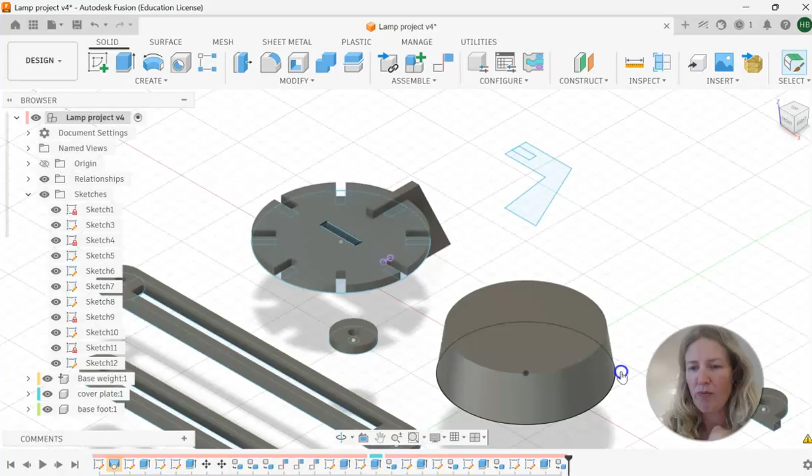So here we go. Let's go to new, and a new part design. We're going to start a new sketch on this plane here, and we're going to start with a circle. There we go.

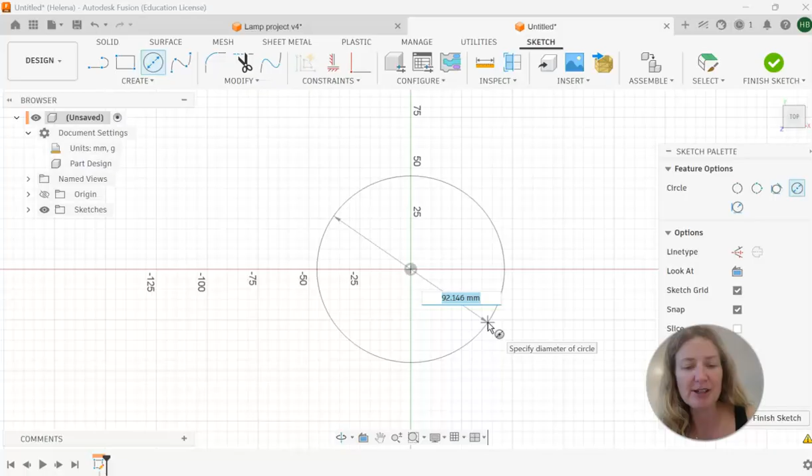So I'm going to give a 10 mil allowance on either side of our circle, which is already 110. So I'm going to make this 130. I type 130 and then I press enter.

All right, so next up we're going to create our notches. Now I'm going to intentionally draw this not centered, because sometimes it can lock to center and then be a little bit difficult to position. So I'm just going to draw it somewhere up here, but not in the perfect place.

Now this is our notch out, which you're going to make a choice on: is it going to be 3 millimeters, or is it going to be 6 millimeters with double layered plywood? So I'm going to keep things simple and go with 3.

Firstly, the depth of my notch out needs to be a reasonable depth so that it's strong. I'm going to choose 7 millimeters. So I type 7, then I press tab, and then I type 3 for the width of the plywood, and enter.

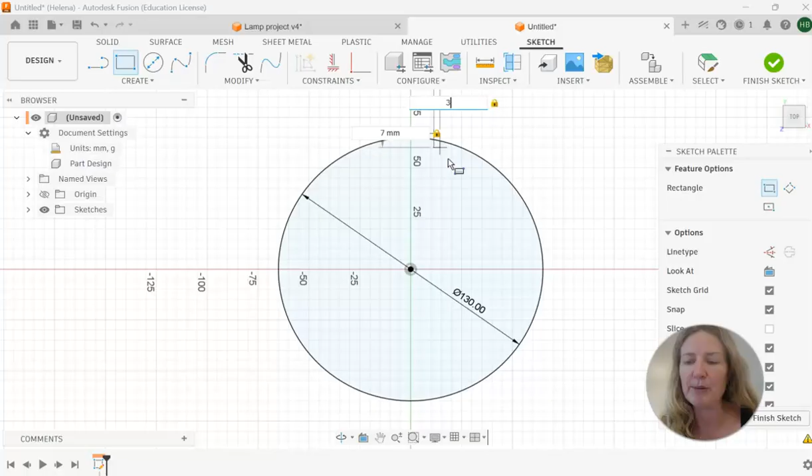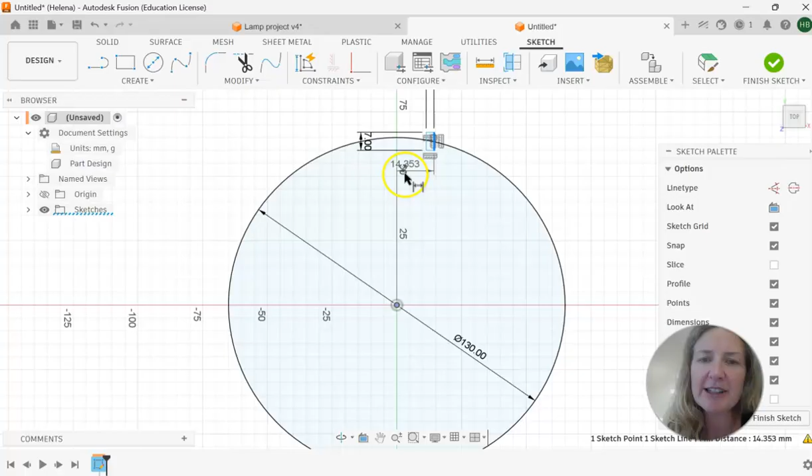All right, so now we're going to use our dimension tool to position this notch out where we want it to go. So I'm going to start by getting it centered. I'm going to work off this center point here and click this outer edge right here. Okay, now I've clicked those 2 points and you can see the inference popping up there. Now it's not live yet, so I need to actually click for a 3rd time and then it's going to come live so I can edit it.

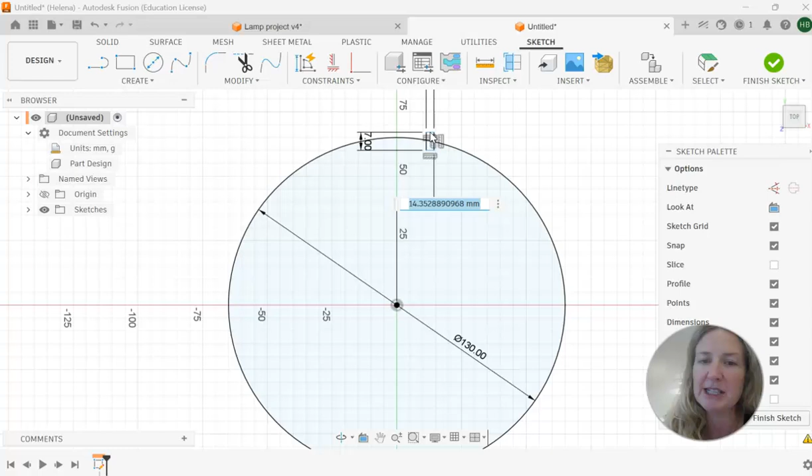Well, we want it to sit perfectly on this center line here, so we're going to halve the length, or this width of the material. So it's going to be 1.5 millimeters. Press enter. Alrighty, so that's our first one. You can see it's centered there.

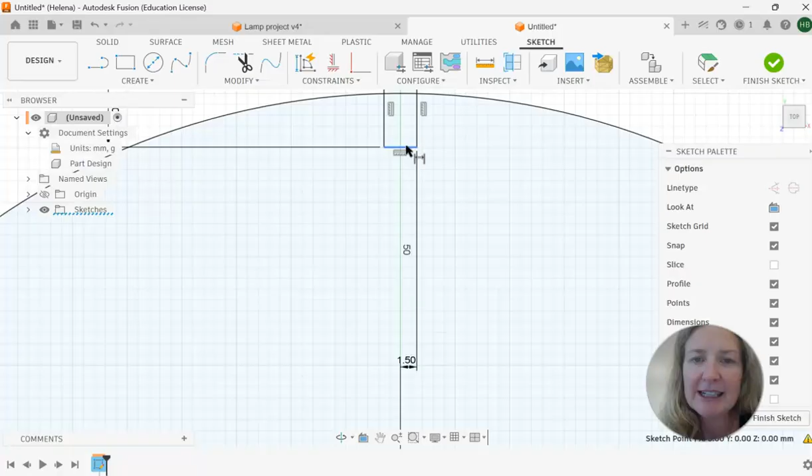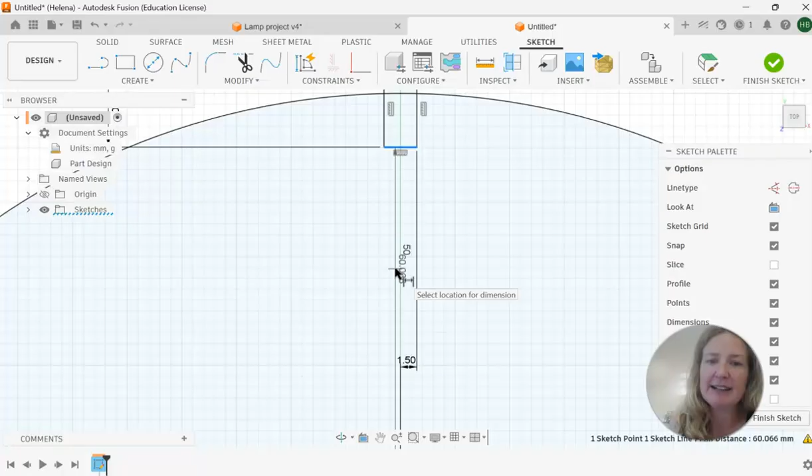Now our next dimension, we're going to go from center. And this time I'm going to just zoom in to make sure I select the right part, so I make sure that I'm clicking in the middle of our notch out there. Okay, and so if we think about our 7 millimeters and our total distance, 130 divided by 2 is going to give us 65, and then 65 minus 7 is going to give us 58. All right, so I'm going to click there and 58, press enter.

All right, so we're almost there. We are centered and we're in position. Great, all right, just going to zoom back out now.

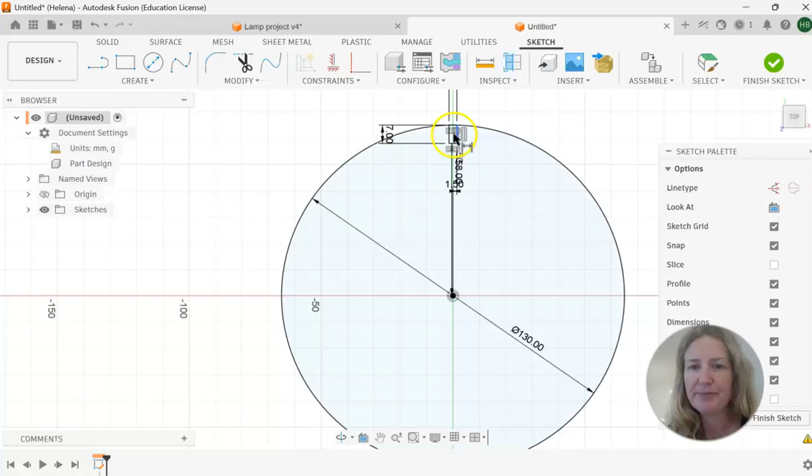All right, so the next thing that we need to do is we're going to repeat this object around the circle for however many legs that you want to create. That process is called a circular pattern.

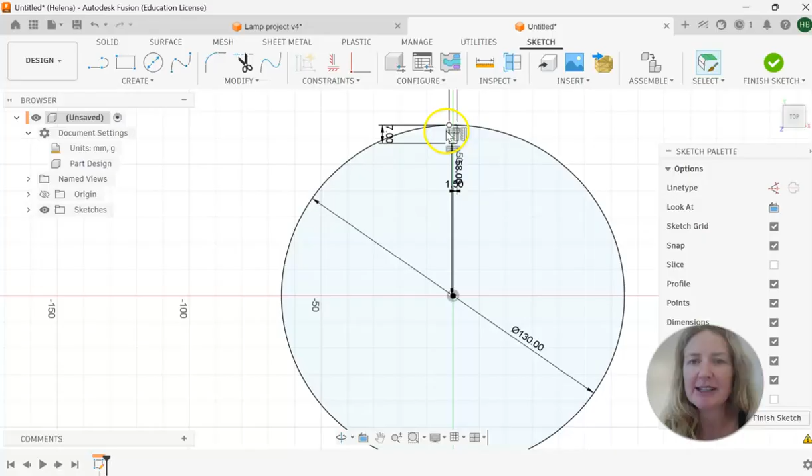So we're going to go to the create menu. Oh, hang on, first we'll select it. So I'm just going to go in and zoom in here and make sure that I've got my little rectangle here selected. 1, 2, 3, 4. All right, and I'm going to go to create menu and circular pattern.

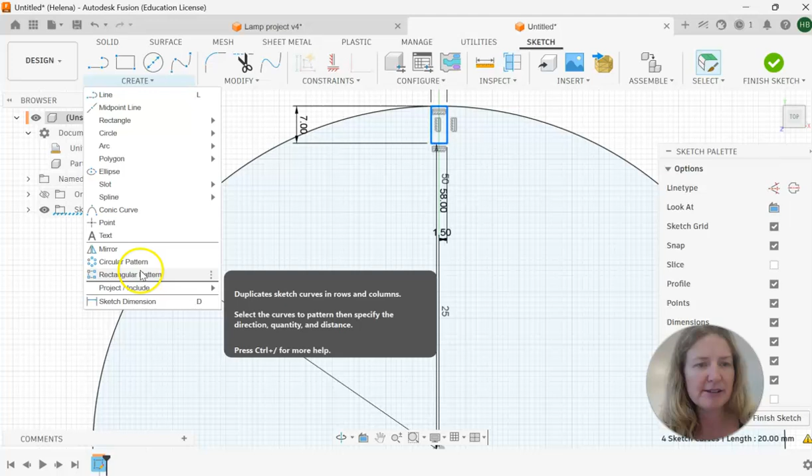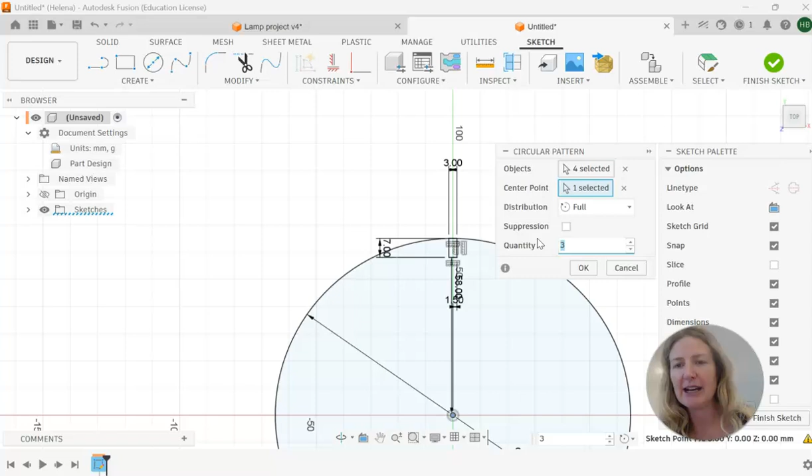Alrighty, and I've got my 4 objects selected already. We then need to select our center point, so I'm going to click the center of our circle. Alrighty, now here we've got the distribution set to full. That means they're going to radiate around the entire circle. And then we have to say how many we want, so I might say I want 10 legs. Alrighty, and then we're going to press OK.

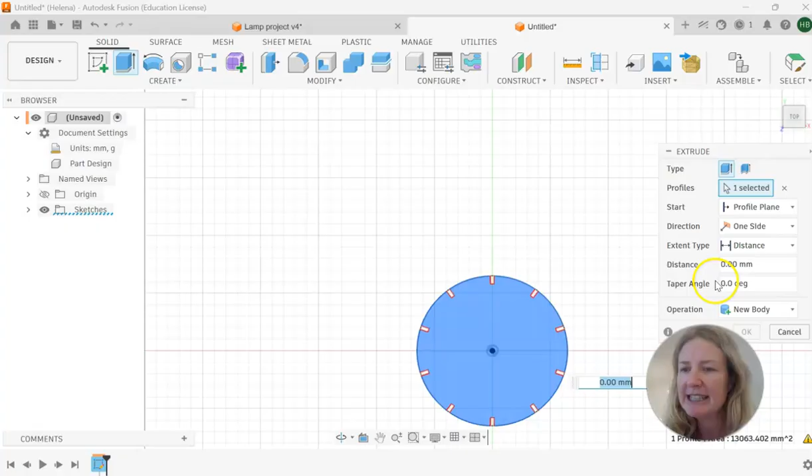And that, people, is how it's done. So I can now press Finish Sketch, and I'll go to Extrude, and just click on this center point here. I'm just going to move this up here.

So we're going to say operation needs to be new body, and our distance is going to be 3. Alrighty, and should be able to press OK, and that's all done.